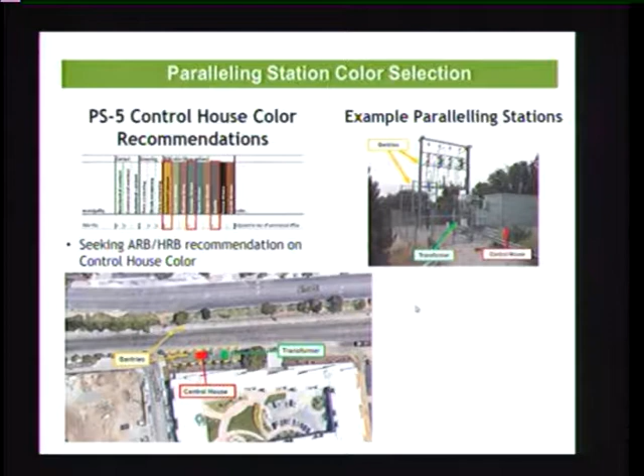the paralleling station there near the Park Plaza project, 195 Page Mill, is another place where color choices are available for discussion, and I'll let the project team cover this. They have these slides as well in their presentation.

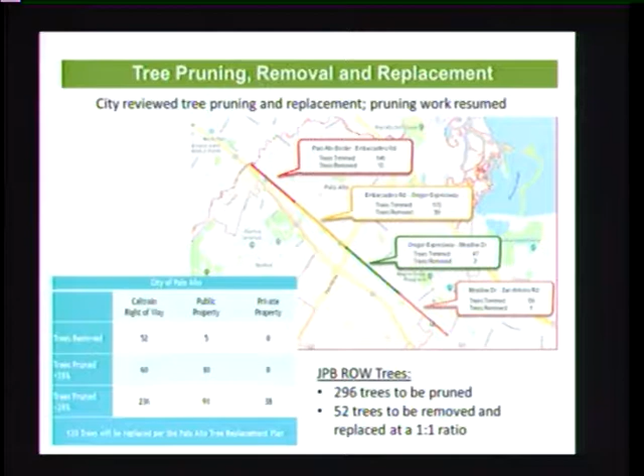One thing that came up was the letter, as mentioned, from Mr. Borak. We had presented this in November about the fact that pruning work had begun and that pruning work would resume. The team can say more about that, but this slide had been presented back in November, so we were aware that there was tree activity. And that concludes staff's presentation.

I'm going to switch this to the applicant's presentation. Are there questions of staff while we're uploading?

In response to Herb Borak's email to the HRB and the ARB, I'd like to point out that the CalMod.org website has a place where you can sign up for weekly updates on where the construction is occurring. I get those now, and they're pretty thorough—you can keep track of where construction is happening throughout the entire corridor by signing up for that.

Thanks for prefacing that, Chair Bauer. If you sign up at calmod.org/get-involved, you can enter Palo Alto as your city of residence, and we'll send weekly updates to all folks interested about construction along the whole corridor. We also send updates just for work happening in Palo Alto, and if a new phase of work is starting, we send an update to the city as well.

So thank you all again for having us here today. I'm Brent Tejan, here with Lynn Guan and Stacy Koch from the Caltrain Electrification Project, to give you an update on the pole color selection that was continued from the last ARB meeting in November.

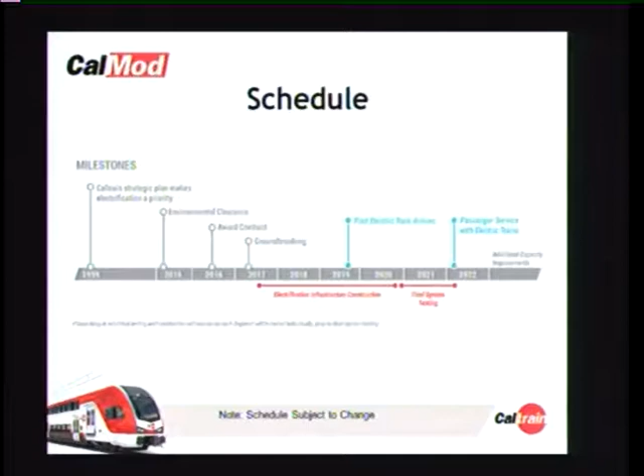There was a request last time for renderings of the stations with poles. We have color samples that Amy provided, and I have additional ones here—I'll bring one up for each different station. This is Palo Alto Station with the warmer brown on top. For Palo Alto Station, our architectural consultants suggested this warmer yellow tan color to match the historic station at Palo Alto.

I'll just note that in this light, it's a long way from yellow. Yes, these slides don't do it justice. I'll also note that these chips are glossy, however the poles will be matte, powder coat matte—all the poles along the corridor will be matte to reduce glare.

I don't know if you want to take each station one at a time—I'll defer to the chairs. I think if you'd tell us what the meaning of these various samples is, that would be helpful, and then we can have our discussion. Sure, these were recommended by our architectural consultants. The first one was the warmer one—the tan—which was the recommended color based on matching the station.

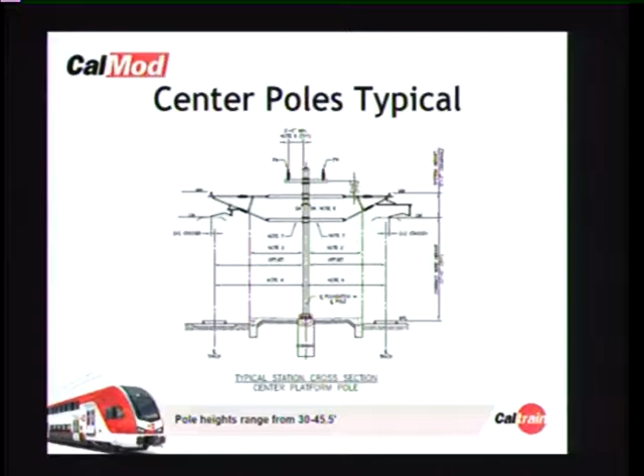Again, these yellows aren't doing it justice, but the chips are much closer to reality. This is typical of what a center pole would look like. Center poles in general range from 30 to 45 and a half feet, typically in the 35-foot range.

And this is typical of a side pole at a platform. The side poles are the shorter ones, in the 30 to 35-foot range.

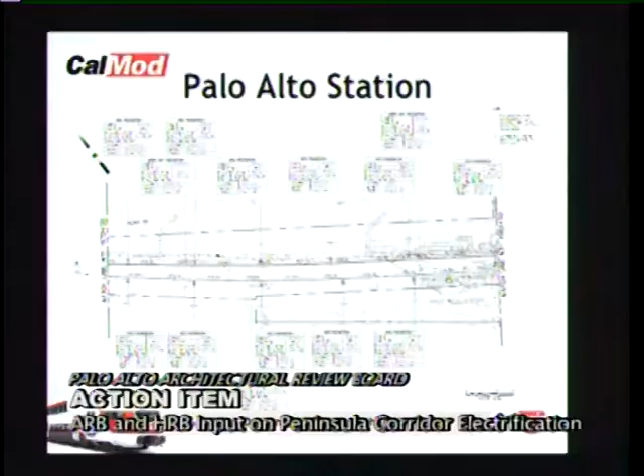You can see, might be hard to see, but hopefully you can see on your screen. The stations are kind of hatched out here. So this is the first set of the Palo Alto Station, and this is the second.

These small dots here are the poles. These will be center poles. These would be side poles. Side poles here as well, and the center pole.

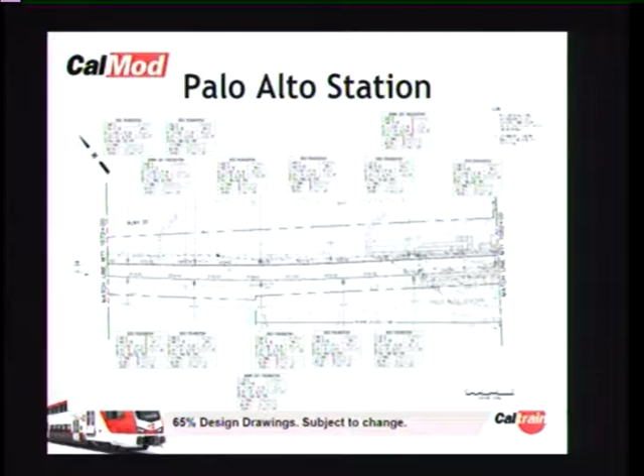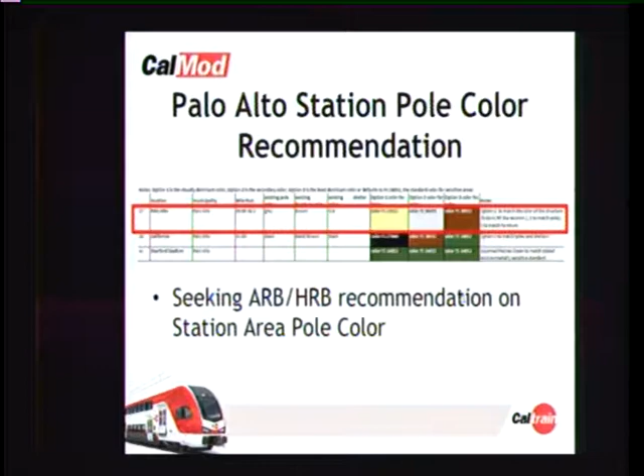And this is just a summary of the color recommendations for all the stations, but I'll continue going through the rest of the stations. We are seeking the ARB, HRB recommendation on station area pole colors. That recommendation would go to the city, and the city would have final say.

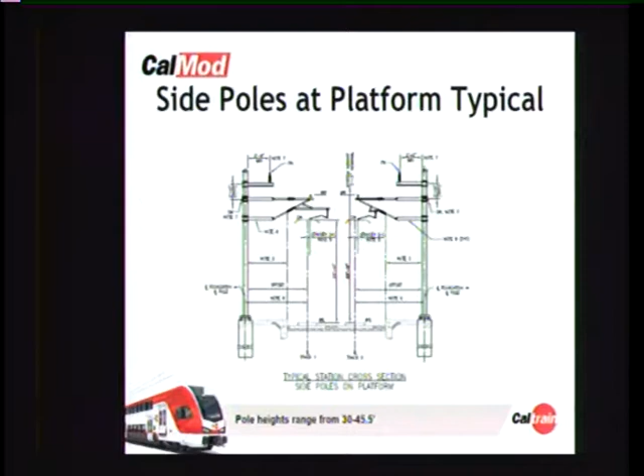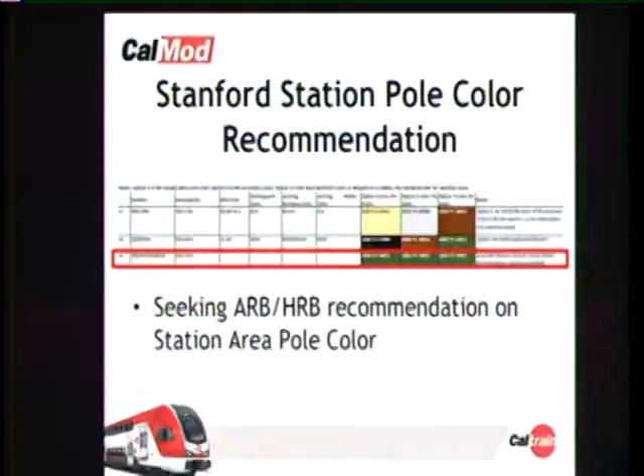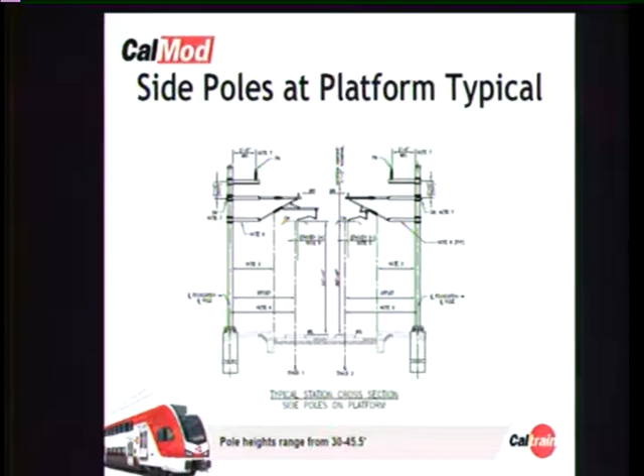Black was the recommended color, with brown as second and marine green as third. Black was recommended to match the current poles and shelters at that station. Again, typical side poles for the station areas, with design for California Avenue Station highlighting side poles about every 150 feet.

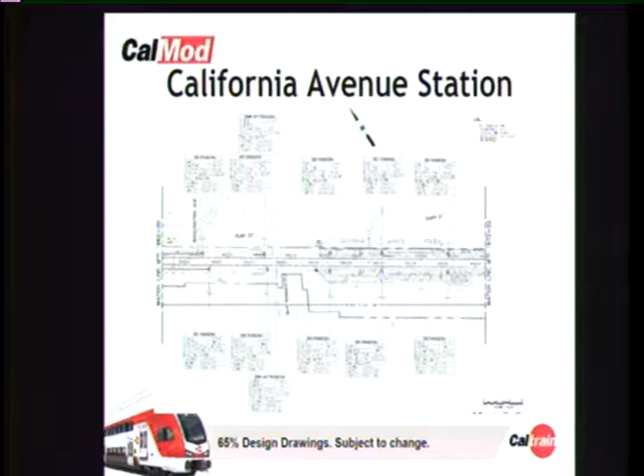So that is it for the station areas. We do have color selection for the PS5 paralleling station. I can go into that as well if you'd like. And what about the non-station poles?

Those will all be marine green per the MMRP, the Monitoring and Mitigation Reporting Plan. So we could change that.

Okay, so to summarize, you're going to talk — if it's okay with the board members, I think it'd be good to talk about the poles first and then the paralleling station. Does that make sense? Seeing nods. I'll provide another set of chips as well for both California and Stanford Station.

So marine green is the default color for poles in the city. This was described and defined in the mitigation and monitoring report for the EIR. That's correct, when they did that.

You're also suggesting marine green for Stanford Station, which is sort of a wide place in the right-of-way. And black for California Avenue. And what's the name of the color you're recommending for the Palo Alto Station? I would say a tan to match the Palo Alto Station.

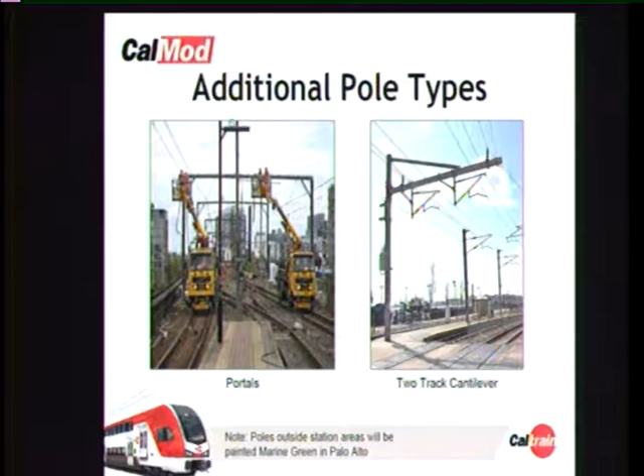Sure, thank you. All right, paralleling station. I wanted to show that there are additional pole types, in addition to the ones I showed for the details. There are some portals which are a little bit wider for the wider tracks, and then some 2-track cantilevers within the city of Palo Alto. And again, all poles outside of the station areas will be painted marine green in Palo Alto.

So there is a paralleling station being installed in Palo Alto. I'll show a diagram of the location in a moment. The paralleling station - there are 10 traction power facilities throughout the corridor. Those help provide and distribute power to the new electrified system. The paralleling station in particular does not get power from PG&E, it gets power from the overhead lines and then helps redistribute it throughout the corridor.

The facility components are the transformer, gantries, which are up to 50 feet, and the control house, which we will look for your recommendation on color selection. And these are unmanned, secure, and lighted facilities.

Paralleling station number 5 in Palo Alto will be located just south of Page Mill Road on Caltrain property. We have coordinated with the city on location during the EIR phase. Vegetation screening will be implemented at this location with a review and input from city staff.

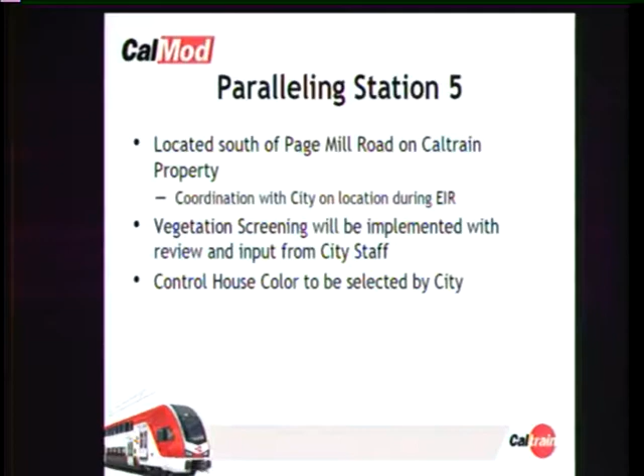The control house is to be selected by the city. The colors will be selected by the city with input from HRB and ARB.

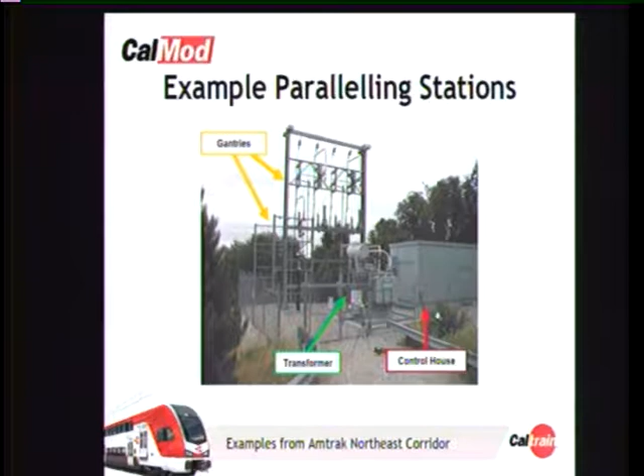This is an example of a paralleling station from Amtrak Northeast Corridor. You can see the components here in green; the point in green is the transformer. The gantries are both this one in the foreground and then this one in the background, these H-frame steel structures. And then the control house is the one on the right here.

The colors highlighted in orange are the ones recommended by our architectural consultant. So can you clarify, is Crossbed Canyon the control house color? Correct, yeah, it'd be the control house. Is juniper green the gantry color? These are all considerations for the control house color. Oh, just control house color? Yes, correct, these are options for the control house color.

And the gantry would be marine green? No, I don't think so. We don't believe so. What do we believe it would be? Just galvanized steel? Yes. Excuse me, I'm trying to look at this.

So I'll take a moment here to ask another question. Is there a reason why the gantries, those towers, would not match the rest of the towers on the corridor? It's just something that we had not included as a specification in our contract. We had been focused on the poles, and there wasn't a consideration to not include it. For standard material purchase, the gantries went with galvanized steel and didn't specify a color.

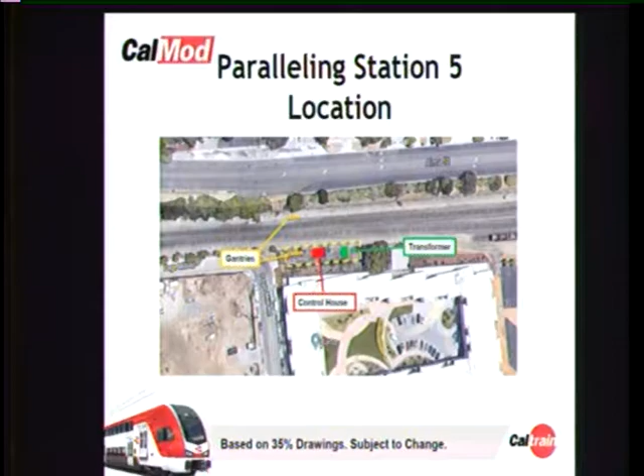Okay, so is the roof also going to be visible from the housing nearby? Is that correct, or am I seeing this wrong? Is that a blank wall? It's a blank wall, so it's not a problem, there's not a single window.

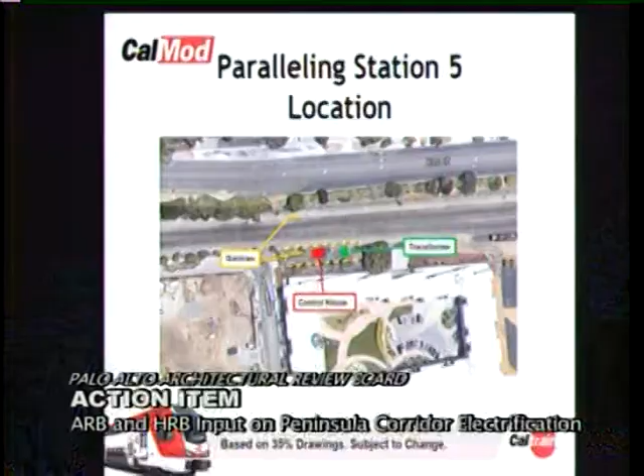Between the paralleling station and 195 Page Mill Road, there is a row of newly planted redwood trees. That should do it. And then the next thing over is the train track, and then there's landscaping, and then there's Alma. Is that right? So there's quite a few opportunities for screening.

Correct, and the current thought is to do the screening around the perimeter of the facility with trees and vines. But if you needed to do more, you could also do it on the other side of the right-of-way, on the edge of Alma? Stacy, is that correct, city staff? That's part of city right-of-way, and we are always amenable to increasing the vegetation in our right-of-way.

Board Member Balte? Well, I think it comes down to the color, and to me juniper green or beetle would be the two preferable choices. They're slightly darker, they'll go better with the live oak colors. It's really tough to put us on the spot in this light to make that call. I'd say you guys should let your architects make that call, but I think a darker green is preferable.

Okay, my view is that darker is better. My view is that it does matter how it looks from the top, these are fairly large structures. People will see them, and one of the big problems is it makes a big difference what you see when you look outside a train window. And often you have no control of it. Often cities show their most dilapidated faces to a railroad right-of-way, that's less true now.